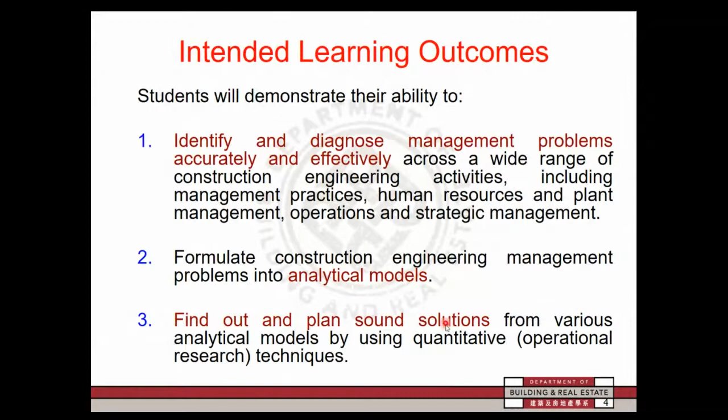After identifying the problems, you may put your problems into some kind of analytical models for analysis. Then, based on the results of the analysis, you can make your decisions and make your recommendations, solutions, based on the results obtained from those operational research techniques in order to get the best optimal results for implementation. So by the end of this subject, you should be able to achieve all these learning outcomes yourself.

We also come up with around 10 lecture topics for this subject, including construction productivity measurement, part 1 and part 2, that I'm going to share with you tonight. After that, I will start to share with you some of the common operational research techniques that you can use in order to find out the best solutions for you, including decision theory and application, inventory control theory, as well as Monte Carlo simulation. Okay, we try to play around with probability and statistics under those theories.

Last but not least, I will also share with you how to achieve fast-track construction from technology point of view and from management point of view. In the past, in order to achieve fast-track construction, we would make large scale prefabricated structural elements like precast facades, precast staircases, precast beams, and precast kitchens, especially for those public housing projects.

More recently, the CIC, Construction Industry Council, tried to make a big push in using MIC, modular integrated construction methods, in order to develop those prefabricated units put on top one by one to the building, in order to achieve fast-track construction by using those new technologies. So I will go through all these topics with you during the first half of the subject.

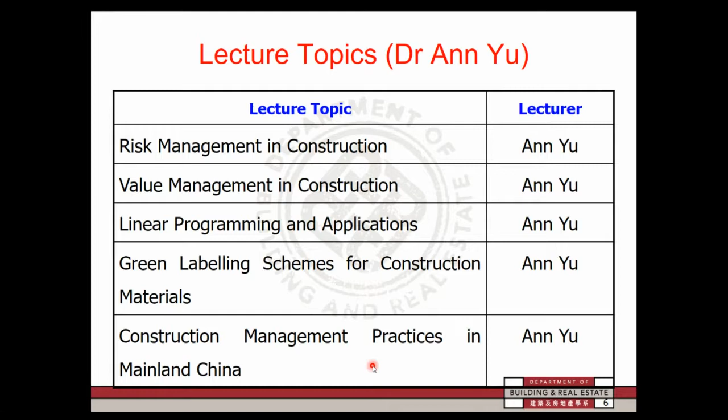Last but not least, she's going to share with you some basic concepts, operations of construction management practices in mainland China. Okay, in terms of teaching and learning approach, for part-time students, usually we have 3 hours per night. Usually we have 2 hours for the lecture plus 1 hour for the tutorial.

In the lectures, we try to present to you some basic concepts and principles of different topical areas that I just mentioned. Apart from lectures, we are going to have some small group tutorial sessions, so that in the tutorial classes, you'll be given some in-class problem-based assignments to work with in order to test your understanding, applications of those concepts in real life, and also some discussion topics, problem solving, and group presentation. And the detailed arrangement of the tutorial will be briefed by the subject tutor during the first tutorial class of each

next week. Apart from those lectures and tutorials, you may also need to have some kind of self-study yourself by looking at those recommended references already included at the end of each lecture PowerPoint file, and also included in the subject description form for your self-study and self-learning.

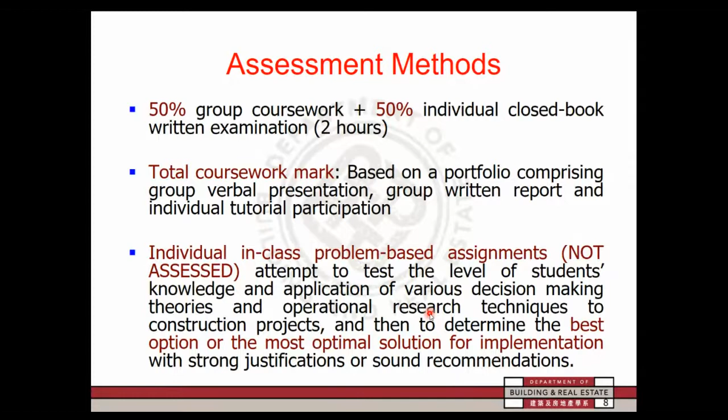Again, you are strongly recommended to refer to those recommended references already included in the subject description form, as well as at the end of each PowerPoint file for self-learning.

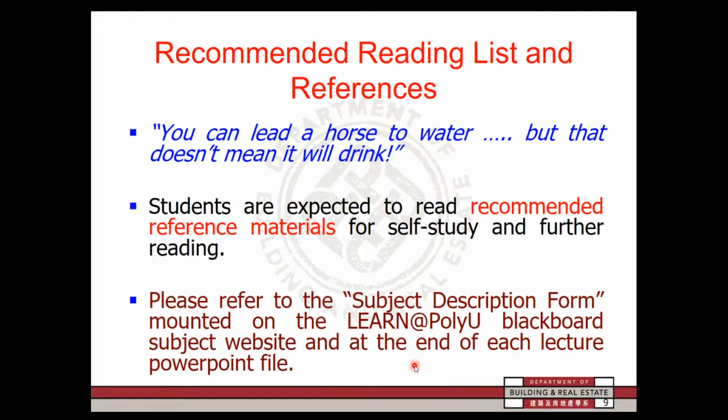Okay, most of the subject material is already uploaded to the Learn at PolyU Blackboard website. You may just simply go to this web link URL and log in with your student ID and password. The essential information is already marked up there, like the subject description form, lecture and tutorial schedule, the subject introduction that I'm sharing with you right now, corresponding lecture notes, and associated in-class tutorial exercises for you to work with. The questions and guidelines for the seminar presentation, very detailed, are already marked up there.

Last but not least, there should be some standard evaluation forms for the verbal presentation and written report, including the guidelines, the assessment criteria, as well as the assessment rubrics, before your verbal presentation and submission of your written report, so that you can see how you are going to be assessed in the verbal presentation as well as the written report. Okay, that's a very brief introduction about the subject.

Okay, any problem so far? Okay, students, is it clear? Can you follow me? Okay, good. I just remembered that you have already finished your capstone project, BRE 466, in last semester 1. So this semester would be your final semester before graduation, including this subject. Okay, thank you for your responses. Okay, I saw quite a number of students joining in after work. Welcome again to this subject, just to catch up.

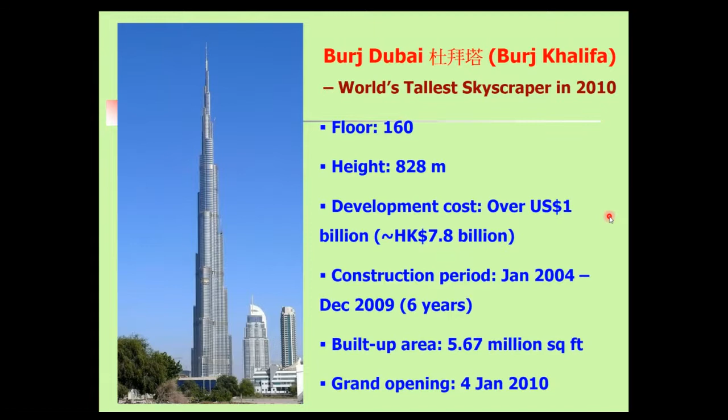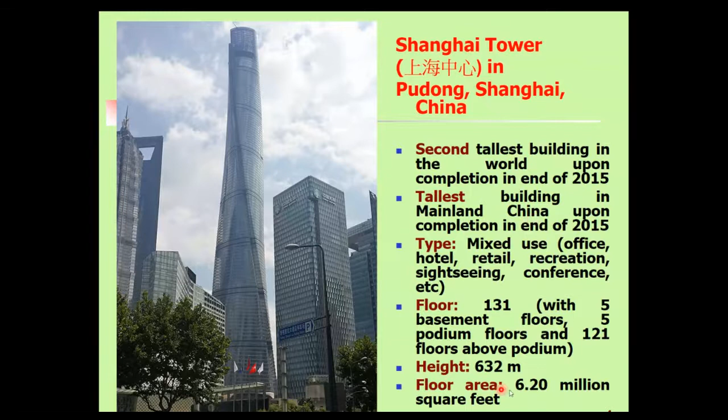How about in mainland China? In mainland China, we also have another high-rise building, Shanghai Tower, located in Pudong, Shanghai. It was claimed as the second tallest building in the world upon completion in 2015, and as the tallest building in mainland China. It has a height equal to 632 meters. Nothing is impossible, again, if you have money in hand.

Okay, so the topics that I'm going to share with you under this area are what production and productivity are by definition, and what the common productivity techniques are that we can use, including work study. Under work study, we may have method study and work measurement. Work measurement techniques will mainly consist of continuous time study as well as activity sampling or work sampling methods. Last but not least, I'm going to share with you some of the essential factors which will affect construction productivity, sought from different literature reviews.

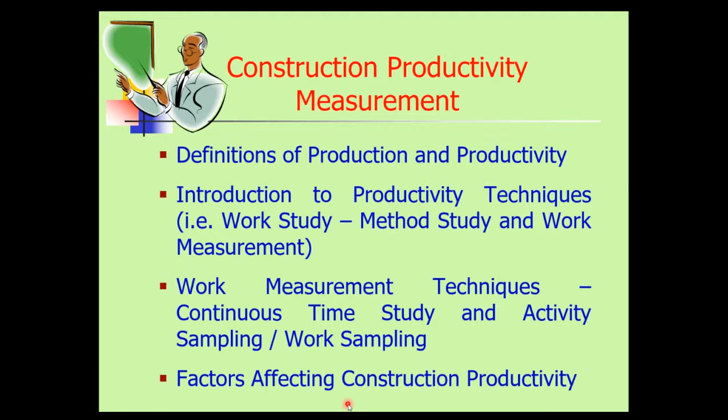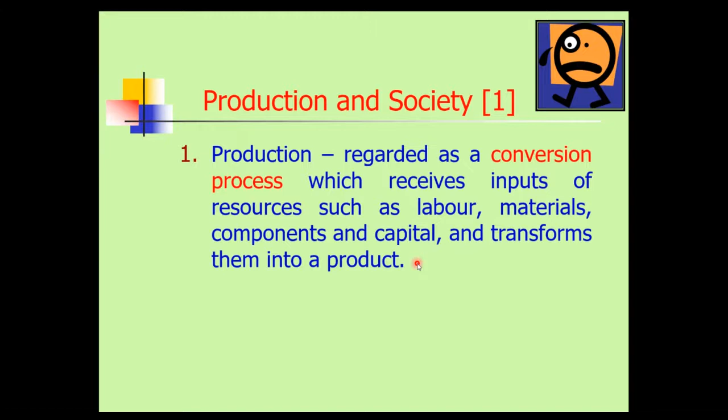Okay, first of all, what is production by definition? Production is simply a process, a conversion process. We try to convert the inputs, like labor, material, components, capital, into some kind of outputs, like our final products. The final products usually add value. That means the total output will be more valuable than the sum of the individual inputs. Just like under synergy theory, 1 + 1 is larger than 2, because the final products will be more useful.

Or you can use this diagram to show the relationship. Inputs can be labor, materials, components, or capital. Then what are common labor in construction projects?

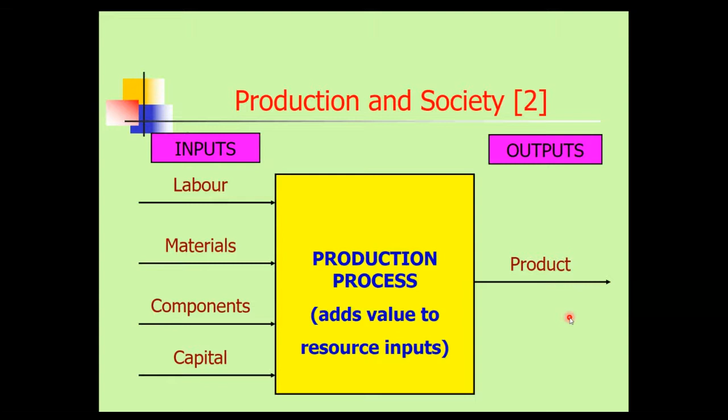Okay, what is production function? Production function is where we try to relate the outputs to the inputs through a mathematical relationship. Mathematically, output is equal to a function of land, labor, materials, and capital. And the outcome of the production process is usually affected by both factors. One may be technological factors. For example, we can use higher power productive machinery to help us, or we can also come up with some human factors, social factors, in order to motivate the workers to work faster and harder. Investment in education and training so that the skills of the labor can be enhanced, or increase the labor motivation.

If you can achieve a higher productivity level, you can earn more. Or we can also provide a year-end bonus. If the workers perform well, then we can give them a year-end bonus as a kind of appreciation and motivation.

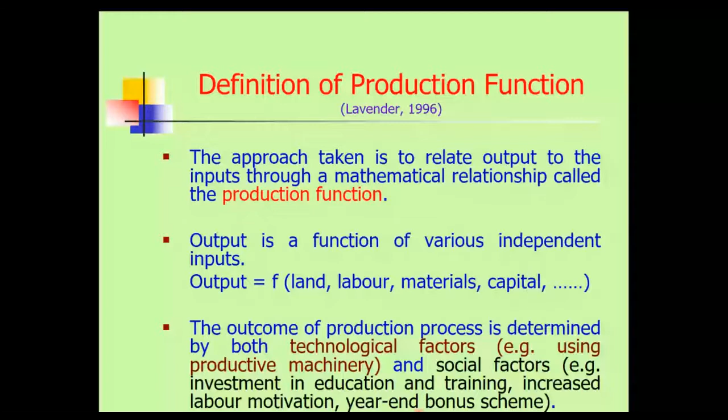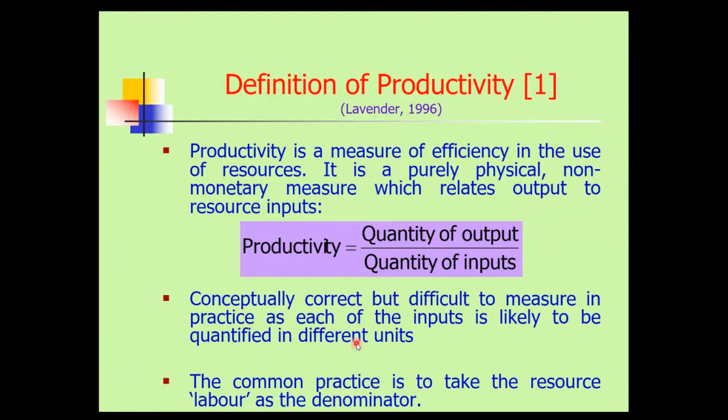Again, productivity can be interpreted as the ratio of outputs to inputs mathematically. Conceptually, this equation is correct, but in real life, it may be difficult to find out, because the inputs from different resources may be measured in different units. It's difficult to combine them into one single measure in real life. Again, productivity is equal to the ratio of output to inputs. The inputs can be labor, materials, plant and equipment, capital, energy, and all these.

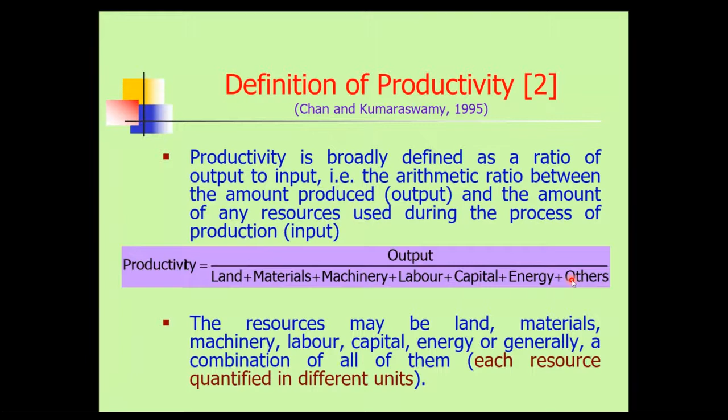So in principle, we try to fully utilize our construction resources, including labor, plant and equipment, and material as far as possible, so that we can complete our project in the least possible time and at lower cost. But in real life, this ideal case will not be achieved. In order to improve productivity, we can enhance it without major expenditure on new resources. For example, the concreting process. We can redesign the concreting process in order to have a smoother concrete delivery from concrete batching plants to your site. We need to carefully design the whole concreting delivery process step by step, so that you can have a smooth supply of material to your site without any interruption.

Or we can also invest some money in resources in order to enhance productivity. For example, we can make use of highly efficient machinery or a higher power concrete pump with higher pumping rates. If we can make use of a higher power concrete pump, you can pump the concrete faster, so that the productivity can also be higher.

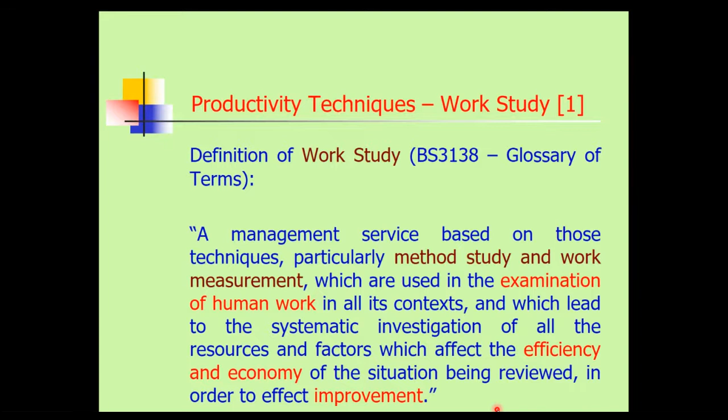Work study: according to British Standard 3138, work study is a technique including method study and work measurement. We examine all human work holistically, and then systematically investigate all the resources and factors which will affect the efficiency and economy of the situation under review, in order to make improvements. This is a very comprehensive definition about work study.

The concept of work study was developed in the early 20th century for us to investigate, analyze, and improve plant utilization levels and site productivity levels altogether.

Under work study, we can have method study or work measurement. Method study means we try to look at the whole production process to see what happened, whether there are any problems in the process. If there are, we try to identify the problem first and then make improvements. Method study means we look at the method of production, the production process itself.

For work measurement, we try to find out the standard duration for a normal worker to complete a task. That means we want to establish the standard for control and comparison—for a given scale of work, how long will it take for a normal worker to complete? We want to set the standard duration to complete all this work.

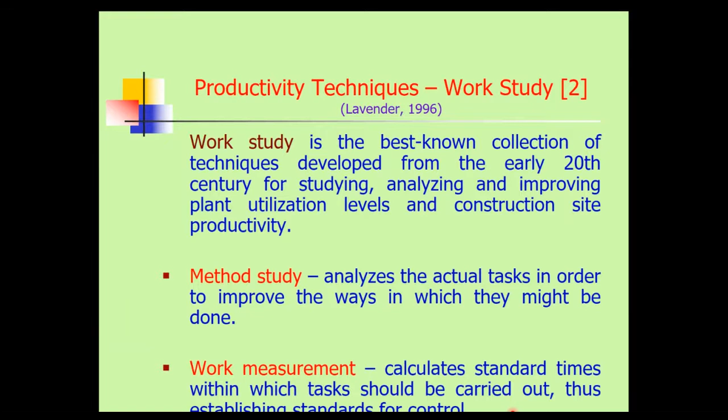By using several productivity techniques, it can give you higher productivity from different perspectives.

To the employer, if we can achieve higher productivity, that means lower cost, and by having lower cost, we can have higher profits. To the workers, if they can achieve higher productivity levels, they can earn higher salary and better job employment terms, conditions, and promotions.

For application, we try to establish a standard for us to follow—for example, how much it costs per meter cube of concrete in order to set the piecework rate and incentive schemes. We need to set the standard, not too high and not too low, in order to benchmark the performance or productivity level of different workers.

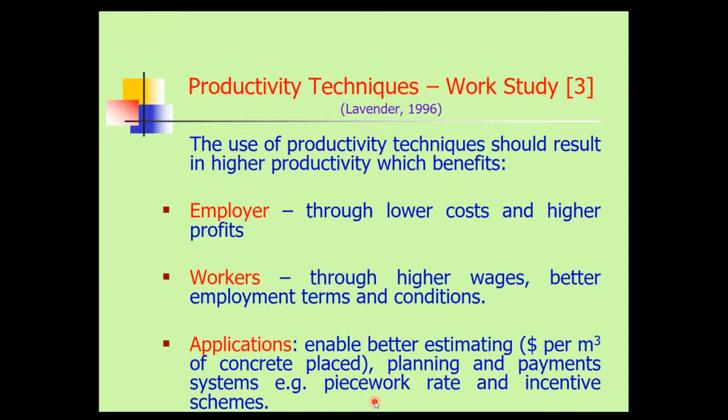Apart from work study, under work study we have a method called method study. Again according to British Standard, we try to systematically record and critically examine all the major factors and resources in the existing production process and the proposed or revised method of production, in order to find easier and more effective methods for the production process and reduce cost.

Again, it's a very comprehensive definition about method study. We also want to note that method study can be regarded as a kind of process observation, because we look at the process one by one along the whole production process to see whether the production line is smooth or not, problem-free or not.

Method study: how do we apply method study in real life? First, we try to classify and select those operations under study that we're interested in looking at, then try to record all the basic procedures along the production process, and then critically examine and analyze the production methods stage by stage.

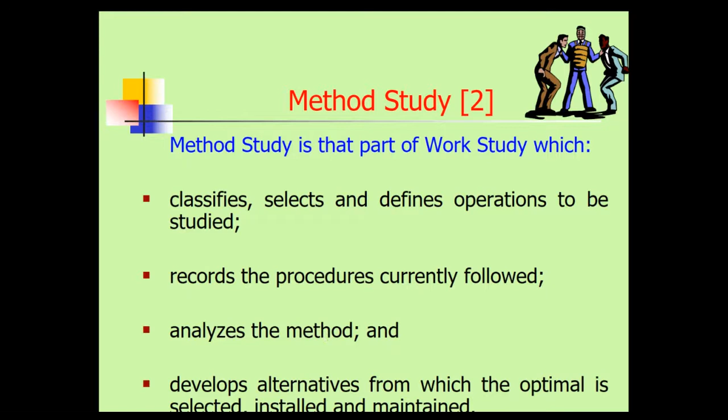If we identify some problems, we may need to come up with alternatives, and then try to apply the alternative for implementation.

Under how can we apply method study in real life? First, we should look at all the resources involved, including labor, material, and plant under method study. We also need to look at the site layout plan—material flow should also be included under investigation.

Usually we try to look at those activities which are repetitive in nature, for example floor cycle times. You can imagine, for a typical building, if the floor cycle time can be reduced by 1 day, the whole superstructure can be reduced by 2 or 3 months, for example.

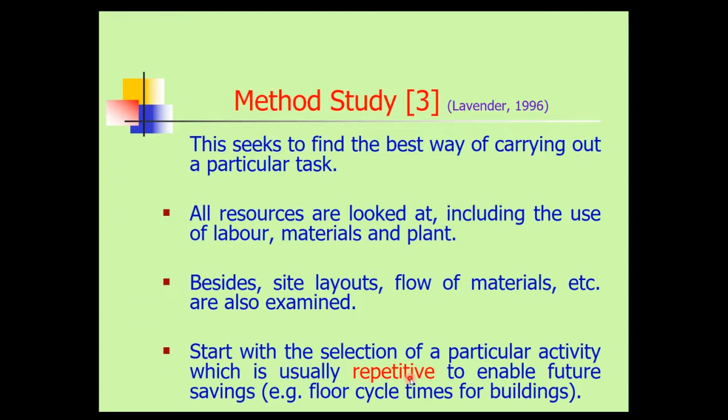If that is the case, the whole project will also be completed earlier by a few months. So usually we focus our attention on those activities which are repeated many times in a project, just like floor cycle times.

So in real life, how can we implement method study? Actually, there are 5 major steps that you may follow. The first one is record.

After identifying your operation, we try to look at those key activities of the production process in more detail by using some graphical methods, usually pie chart or flow chart, to list out the main activities step by step, logically.

Then examine. We try to critically analyze those activities and identify any problems. After identifying the problems, we may need to provide some alternative solutions for implementation. Then we can develop the best method or alternative, and try to install that new method under supervision of supervisors and operatives.

At the end of the day, if you find out that the new method of production is good and effective enough, then we can keep installing it for implementation. Otherwise, we may need to come up with another method and inject it into the production process to rerun the process again.

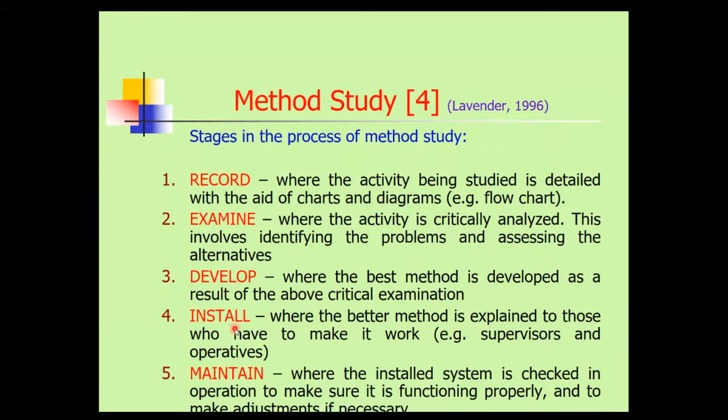Under what conditions should we implement method study? Usually all those situations and circumstances listed here are quite negative or unfavorable. For example, is there any bottleneck in material flow? That means non-continuous concrete supply from batching plants to your site. Try to see whether you have a smooth concrete supply process between the batching plant and your concerned sites.

Or you may encounter some double handling of materials, idling plant or equipment. That means the machinery is always stopped there, doing nothing, or the workers are always standing there without doing things. They may be waiting for something, so we need to find out the reason why they are always idling.

Or your site may have a lot of accidents. Then you may need to find out if there are problems with the safety and health measures being insufficient or not effective. Or you may encounter a high sickness level, maybe due to poor air ventilation or frequent machinery breakdowns. Then we need to find out the reason in order to make some improvement.

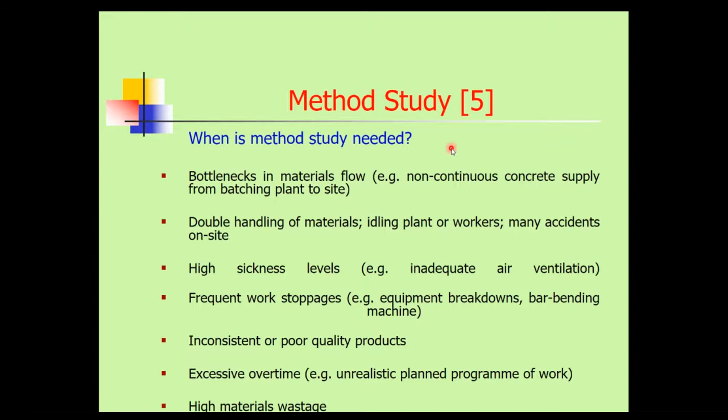Poor quality products, excessive overtime, or high material wastage. For high material wastage, that means there may be some problem in the production process which will affect your quality, and a lot of material may be treated as waste, not up to standard. There should be some problem in the production process that we need to find out. If you encounter all these unfavorable situations, you may consider using method study to find out problems and make corresponding improvements accordingly.

Apart from method study, we also have work measurement. According to British standard, work measurement involves using techniques to find out the time for a qualified worker to carry out a particular job at a defined level of performance. Usually, for a certain operation, we may need to break down the operation into typical activities or sub-activities for us to investigate.

The main function of using work measurement techniques is to set the standards for control and comparison. Work measurement means we try to estimate how long it will take for a normal worker to complete a particular task: 3 days, 5 days, or 7 days. By setting this standard, just like a ruler, we can estimate the bonus rates and the payment by result rates.

That means if a worker can meet this basic minimum standard, then I can pay you the salary. If they perform higher than average level, I can give you more, reward you more. That's the situation where we need to set the benchmark for comparison.

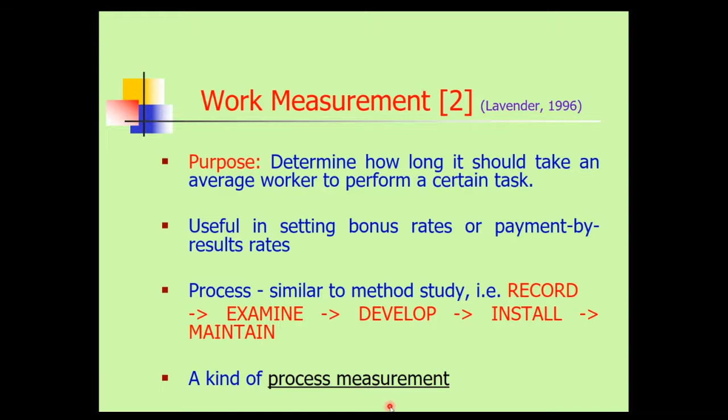In terms of work measurement techniques, we have two: continuous time study and activity sampling. For continuous time study, that means it involves the measurement of the time taken to perform a particular task using a stopwatch. At the end of the day, we want to set the standard, that is, how long we take for this activity to complete on average, a reasonable duration. We applied continuous time study.

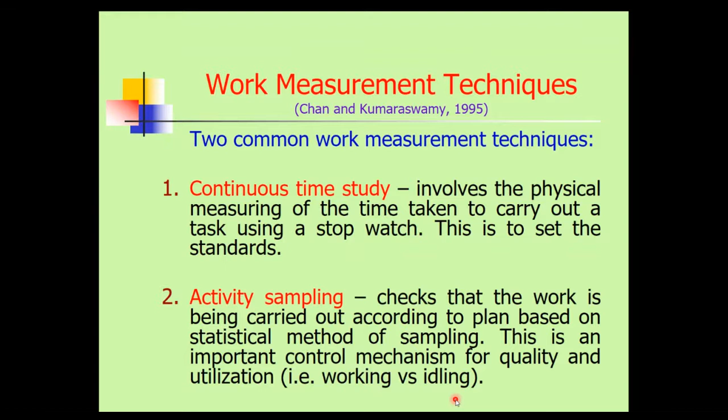Activity sampling means we try to check out the work we are carrying out according to the plan, based on a statistical method of sampling. Again, we are going to play around with statistics and try to assess a mechanism for quality and utilization. For example, whether machinery or a worker is working versus idling, we may want to find out the percentage between them: what percentage of actual working and what percentage of lazy idling for your resources.

Okay, let's talk about continuous time study. There are some basic features that you need to know under time study.

I just extracted some information from a previous journal paper written by me. This Chan is me, and Kumaraswamy is my PhD supervisor, now already retired three years ago. He's now back in Sri Lanka. We published a paper making use of continuous time study and activity sampling. For details, you can refer to this Chan and Kumaraswamy journal paper published in 1995, just over 30 years ago.

Continuous time study will be more suitable for those activities with a cyclic nature, with a few resources involved, just like the cycle times. If we can focus our attention on those repetitive activities, the impact or effect will be very significant.

We try to do some measurements from start time to finish time of a certain activity, using a stopwatch to measure time taken for each sub-activity, recorded on some standard data sheet. From the two consecutive readings from the stopwatch, we can find out the duration for each of these activities for record. In order to achieve highly reliable results, we may need to make an adequate number of site observations ourselves. Those are the key features about continuous time study.

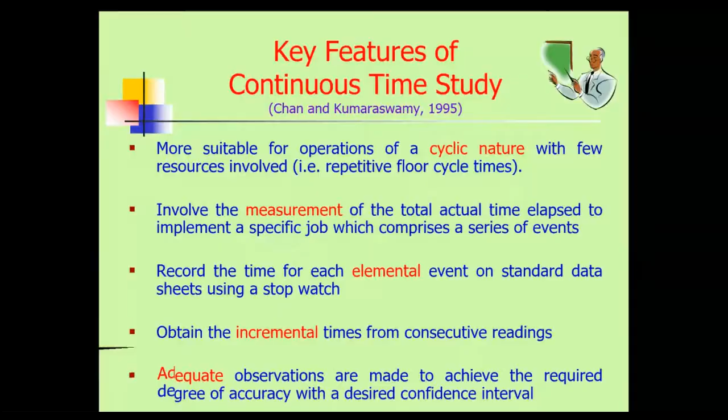In real life, there are a lot of productivity measurement indicators that we can think of, depending on which level - it may be macro level, meso level, or micro level.

For the macro level, usually senior management or top management - your boss, the CEO, the MD - may be more interested in macro level indicators, just like meter square or floor area per man day. That means, per man day, how many meters square of floor area can be completed. It's a more general measure, holistically as a whole.

Middle level maybe at the middle management, just like project manager - how many meters square of flooring can be completed per man day?

Micro level may be more related to the supervisory staff or frontline site workers, depending on the trade. For example, how many meter cube of concrete can be cast per man hour, or how many meter cube of concrete can be pumped by the concrete pump per pump hour. Or how many man hours will be required to cast one meter cube of concrete, formwork or steel. So at different levels of personnel, we may have different measures of productivity indicators.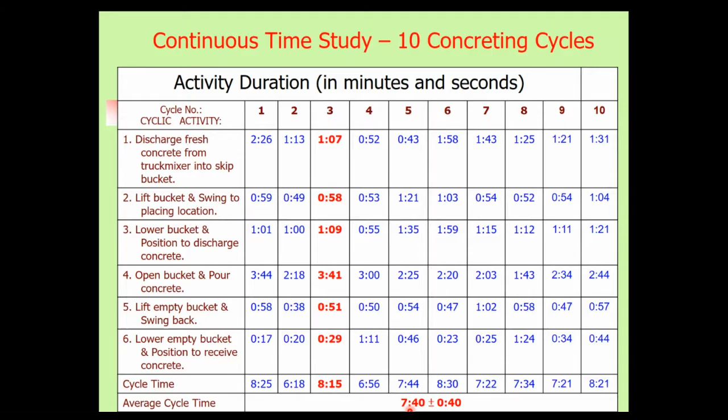Okay, so the average cycle time is 7 minutes 40 seconds. The volume 1.2 meter cube divided by the time for one cycle. We can get 9.4 meter cube per hour if the concrete is to be cast by the tower crane and skip bucket method.

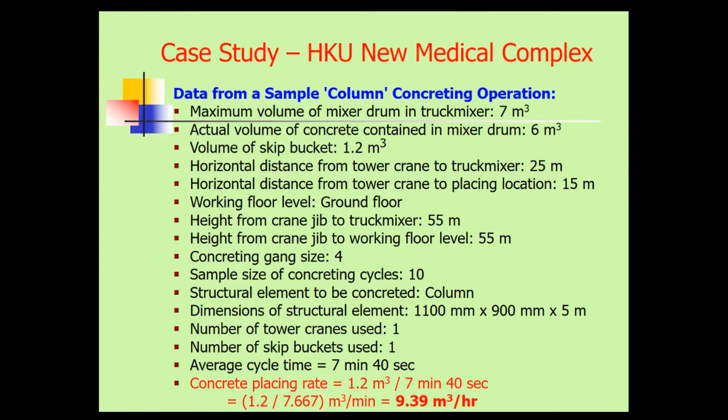Okay, how about the situation for slab and beam? We can also use the same method, but this time instead of column formwork, we pour the concrete into slab and beam. And the average cycle time for slab and beam may be much shorter. Imagine, when we are casting the slab and beam, usually there's a larger floor area, so the time to pour the concrete will be shorter.

Maybe only 4 minutes 30 seconds. For the same volume of concrete, 1.2 meter cube of skip bucket divided by 4 minutes 30 seconds, the yield rate is a bit higher, 16 meter cube per hour, a bit faster than that for column formwork, equal to 9.4 meter cube per hour. It's quite reasonable, right?

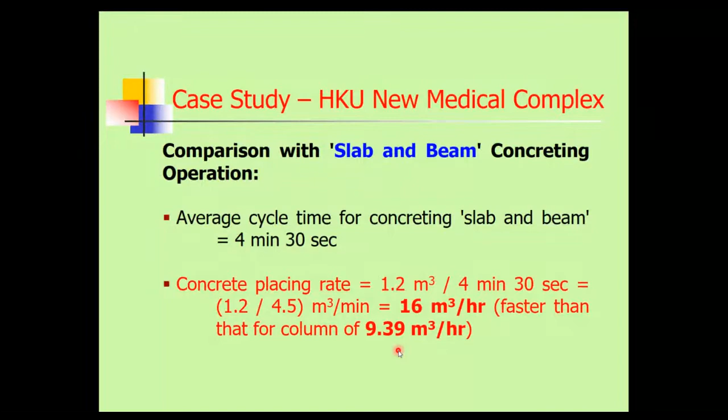Okay, so before going on, I would like to give a short break for 5 minutes, and then we can continue with the sharing at 8:05. Okay, take a 5 minute break first. Take a short break. Can you follow me so far for the lecture materials? Okay, very good. Thank you for your responses. Just take a short break.

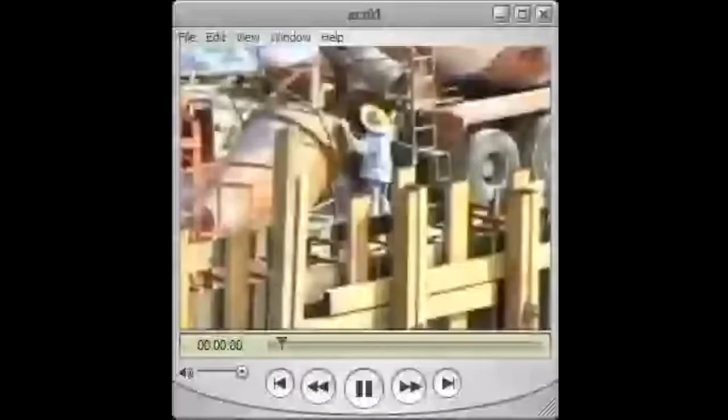Okay, very good. Okay, just look at the video. No sound. Yes, it's no sound. Just the video without any sound.

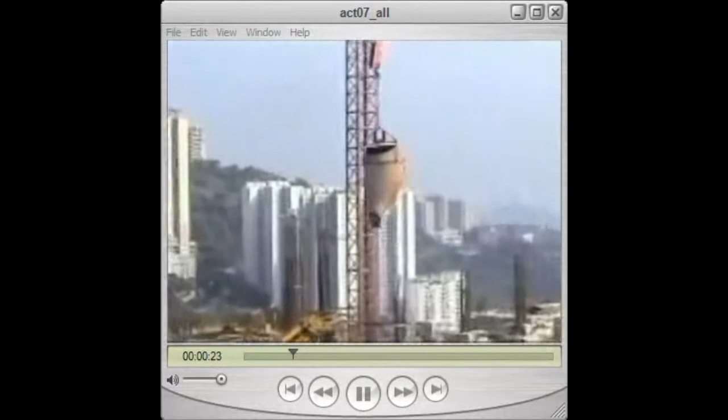First of all, we need to discharge the concrete from the truck mixer to the skip bucket, and the tower crane will lift up the skip bucket and swing to the location where the concrete will be poured out. That means the column formwork. While we are taking the video, we may also need to use your stopwatch to take the time required.

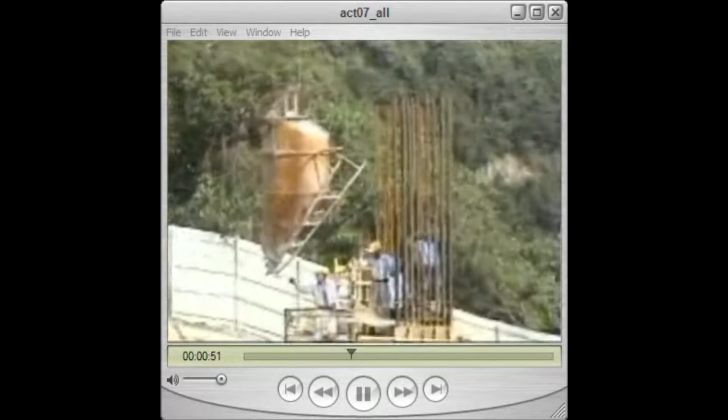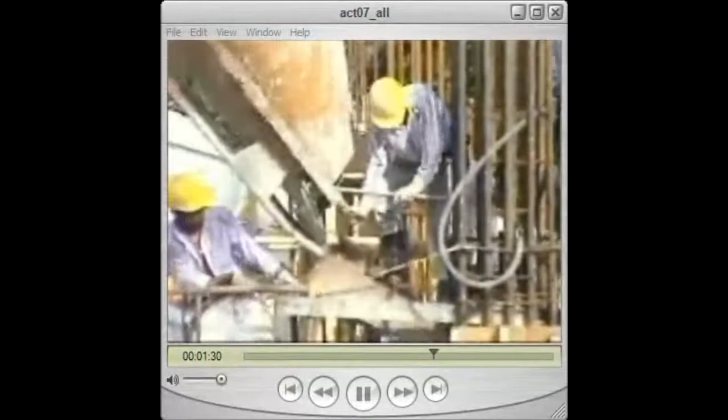Now, the tower crane will lower down the skip bucket, and the concreters are ready to position the skip bucket, and then try to position, fix it, and then open the skip bucket to pour the concrete out. You can see that the concreters are using the poker vibrator to extract the air bubbles trapped inside the concrete in order to prevent honeycombing problems.

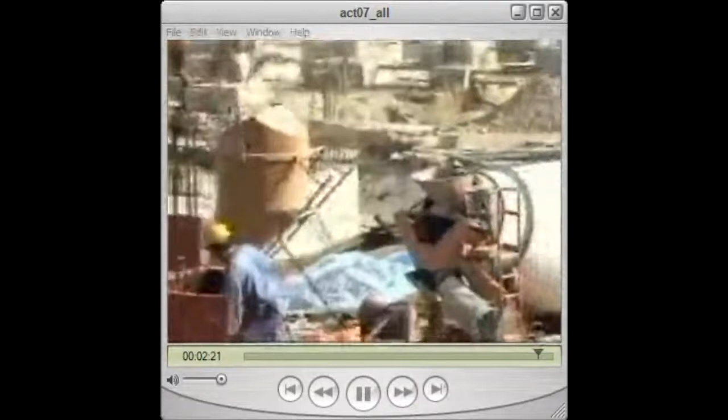Okay, finally, the tower crane lifts up the empty bucket and swings back to the truck mixer position. Finally, the tower crane lowers down the empty skip bucket, and the worker is ready to position it in order to receive the next pour. Okay, because this video is captured and maybe through the Blackboard website, there may be some time difference. Anyway, you can have an idea how to capture the video and measure the time duration for a typical concreting cycle.

Okay, going back to our PowerPoint. Okay, let's continue with the discussion on this one. Let's look at some other situation of time study. Now, for example, we try to compare two different concrete placing methods by using the time study method. Again, based on my PhD research study.

The two concrete placing methods: the pumping method, to pump concrete to cast the beam and slab. Usually for beam and slab, we have a larger floor area. We can use the concrete pump to pump the concrete faster. But for column and wall, usually we need to use the tower crane and skip bucket method, because the area of the column and wall formwork is very, very small. We need to use the skip bucket to slowly pour out the concrete inside the formwork in order to make up the whole column and wall.

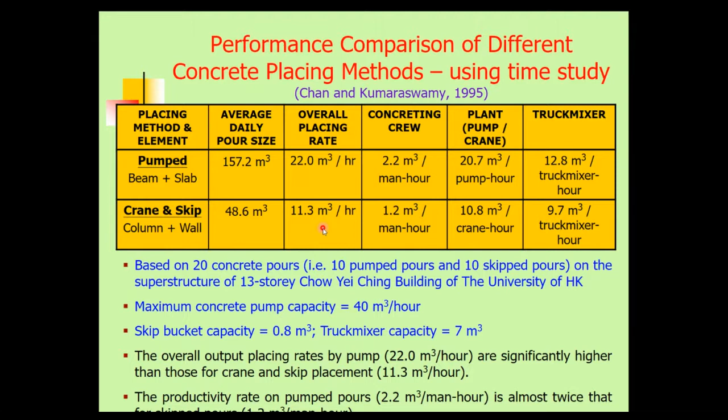Okay, so based on our site observations and simple calculations, we find out that average concrete placing rate by pump is almost double that by crane and skip bucket method. Using a concrete pump to pump the concrete should be much faster than the method using crane and skip.

Another scenario is the time spent by truck mixers at site level. Again, by using the same method, pump beam and slab with distribution pipelines, and cast the column and wall using skip bucket method and tower crane. Then we can measure the average time on site for pump concrete and skip bucket. For concrete pump, because the concrete from the truck mixer will be pumped much faster to empty, the time required will be shorter. But for skip bucket, it should be longer.

Average time for unloading or discharging concrete. This one only takes 15 minutes. Skip method around 26 minutes. So the average percentage time for unloading, that means 15 minutes divided by 24.5 minutes, is around 61.2%. For skip method, 25.9 minutes divided by 42.9 minutes is around 60.4%. We made site observations, 10 observations for each placing method, in order to get more reliable results. So what we can observe here, although the unloading time is quite different between these two methods, the average percentage time for unloading concrete is almost similar, around 60 to 61%.

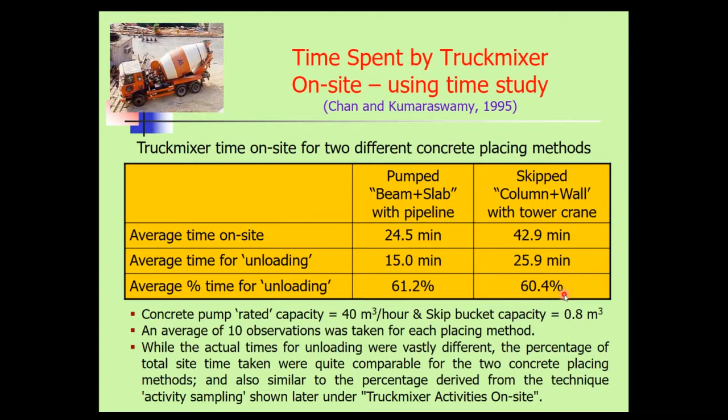Apart from concreting operation, we can also apply the same method to measure steel fixing rates, measured in ton per man hour, based on Hong Kong buildings using the time study method. For example, we have different sizes. Then we want to find out the unit rates to fix steel reinforcement to structural wall and slab. We can take the average around 0.2, right? 0.2 ton of steel reinforcement can be fixed per man hour. For slab also around 0.2.

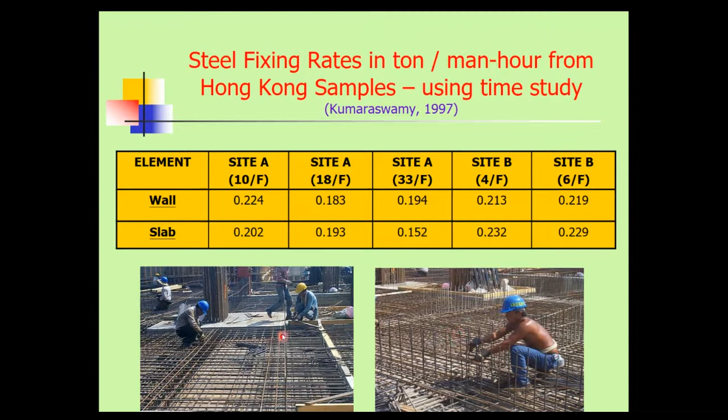Okay, by using this unit rate measure, suppose you have 1,000 tons of steel reinforcement to be fixed, then how many man-hours will be required? By simple calculations, we can find out all these man-hours for site planning. We can see from this photo, the steel fixers are fixing the steel reinforcement to the column and slab. This steel fixer is fixing steel reinforcement to a structural wall vertically. Slab is horizontally.

Okay, another method is multiple activity charts. We try to put all these activities on a single diagram with their time relationship between two or more resources. Usually, we will look at the workers, plant equipment, or materials. This method will be very useful if you want to look at the interactions between workers, plant equipment, and material, which are repeated in periodic cycles, just like concrete cycle times.

By using multiple activity charts, we can find any bottlenecks or idling resources at your site, looking at the utilization profile of each resource in parallel bars. Again, let's take the example of the concrete cycle. A typical concrete cycle consists of these 6 major activities and their corresponding durations.

Then we can put up all this information, all these resources, and the duration on a multiple activity chart. Multiple activity means we try to put up all the major activities for the operation into a diagram for comparison. Horizontally, we can show the time bar: 1 minute, 2 minutes, 3 minutes, etc. Vertically, we can show the site resources: truck mixer, tower crane and skip bucket, and also concrete crew. There may be 3 resources involved in this concrete operation.

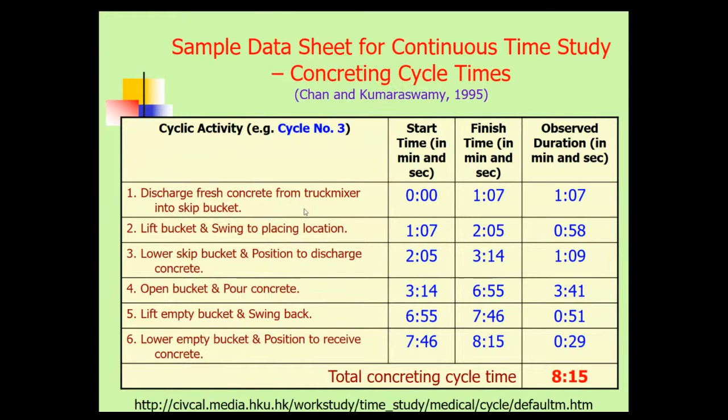How about the tower crane and skip bucket? Then we carry out the 6 major activities, 1, 2, 3, 4, 5, 6, and then finish one cycle. It may take 8 minutes 15 seconds, and then repeat 1, 2, 3, 4, etc. How about the concreting crew? At the first concreting cycle, the concrete crew has nothing to do. So for the first 3 activities, they are idling. They are just waiting for the skip bucket to come. Starting from activity 4. What is activity 4?

Open bucket and pour out concrete, because the concrete crew need to position the skip bucket ready for pouring out the concrete inside. So they need some time to pour out the concrete into the column formwork and make use of the poker vibrator to expel the air trapped inside the concrete in order to prevent honeycombing problems. It may take some time. After finishing compacting concrete, the concrete crew becomes idling again until they receive the second skip bucket ready to be poured out like this. So all these activities will be repeated many times depending on the situation.

How about the second scenario? The second scenario is the concrete crew becomes idling. Maybe they finish compacting the concrete, but the next skip bucket has not yet arrived, so they become idling. We may have these two situations. What can we do in order to sort out scenario A and scenario B? In order to reduce the idling time for scenario A, we can increase the number of poker vibrators, because by having more poker vibrators, the compacting concrete activity can be finished earlier, so that the idling time can be reduced.

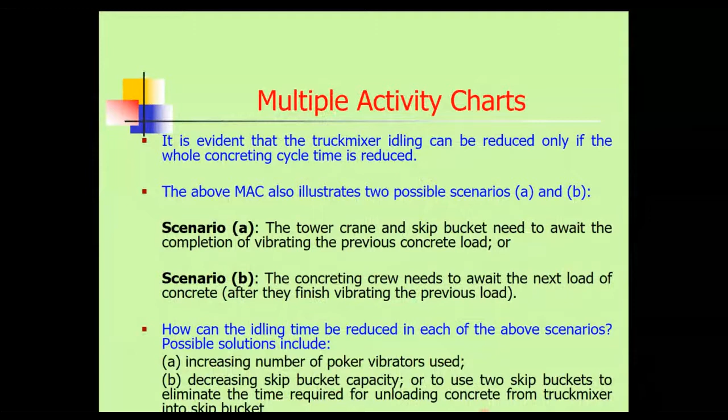For the second scenario, we can decrease the volume of the skip bucket, so that the workers can finish compacting concrete earlier, and then they become less idle. Or we can use two skip buckets. While the first bucket is transferring to the column formwork, the concreter can pour the concrete into the second skip bucket from the truck mixer in order to reduce the time involved. So using multiple activity charts can help us find out the problems and then make some remedial actions for improvement like this.

Okay, apart from continuous time study, we can also have activity sampling or work sampling methods. Again, what is activity sampling? Activity sampling is a technique in which we make a number of successive observations over a period of time of a group of machinery, process, or workers, and try to observe and record what's happening at that instant. And the percentage of observations recorded for some activity is a measure of the percentage of time that the activity or delay will occur. A very comprehensive definition.

Again, in order to have more reliable results, we may need a sufficient number of observations to be made. Statistically, we can make use of this equation. How many site observations do we need? Capital N is the total number of site observations required, that means the sample size. And capital P is the basic productivity level. Usually we assume half of the time is doing something productive, so usually 50%. And L is the absolute limit of error, usually plus or minus 5%, equal to the confidence interval. Confidence level equal to 95%.

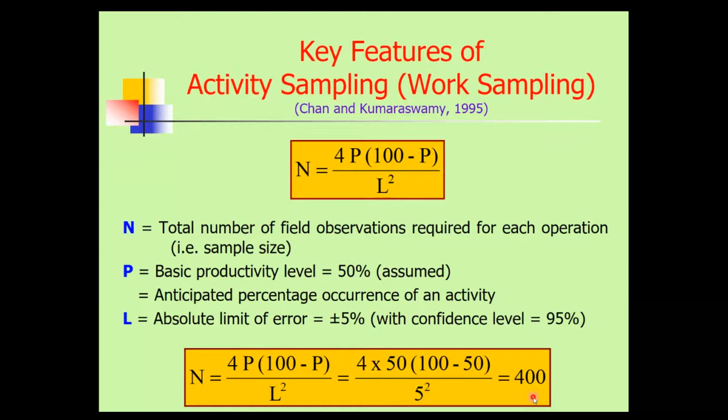If we insert all these values, 4 times 50 times 100 minus 50, divided by 5 squared, that means we need at least 400 site observations in order to get more reliable results. So at site level, we may have a lot of examples of using activity sampling. For example, we want to measure the utilization levels of tower cranes at site level, truck mixer activities, as well as the efficiency of different site workers, like concreters, timber formwork erectors, as well as steel reinforcement fixers.

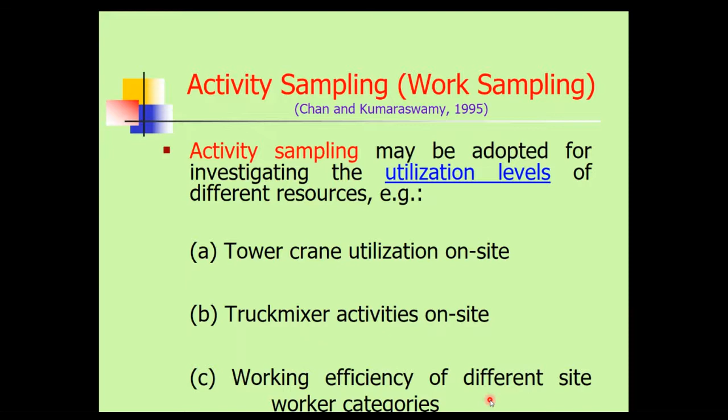So in order to collect the data, we may need to compile a standard data collection form like this. On top of the form, you may write down some details about the project: project name, the date of collection, time start, time finish. At the lower half of the form, you may record the time. Maybe you start the site observation at 9 a.m. sharp, and then on the far right hand side, you can list out whether the tower crane is hoisting the formwork, steel reinforcement, concrete, or other materials.

If it is hoisting those materials, we can regard the tower crane as doing something productive. If the tower crane is just moving empty or just idling, stopped there without hoisting anything, then we can regard it as doing something non-productive. Now suppose I start the site observation at 9 a.m. sharp and look at the tower crane. What is it hoisting at that moment? Maybe this time the tower crane is hoisting formwork. So under formwork, I put a tick here.

Maybe at the end of the day, over 3 working days, you find a total number of ticks here. Add up all these numbers: 254, non-productive 154 ticks. Then you can roughly estimate out of around 400 observations, 254 divided by total number of observations gives you the percentage 62.3%, moving empty...

17.10%, idling around 20%. The crane utilization level is defined as the time spent by the crane working, doing something productive, divided by total time the crane is available for work, multiplied by 100%.

By looking at this figure, 62.3% that the tower crane is hoisting material, the site engineer or planning engineer may think about whether this is acceptable, because the tower crane is only around 62% productive hoisting material on a typical day. There's also a high percentage of time moving empty or idling, up to 20%, so the site engineer can think whether we can make the tower crane more productive by increasing that percentage.

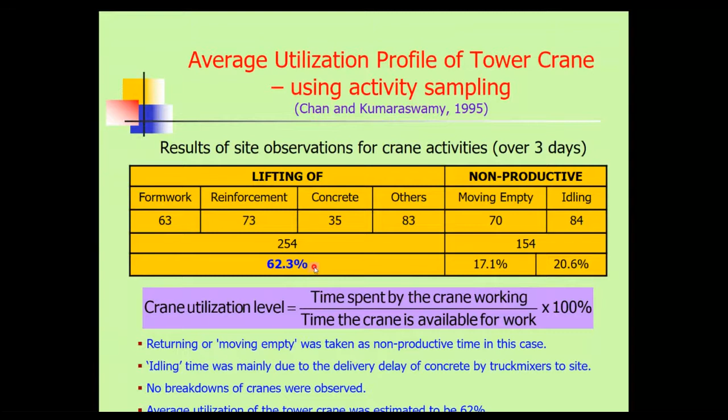Again, we need to find out the reason why the truck mixer is always idling and sometimes queuing. If we can find out all these problems, we can fully utilize the truck mixer time on site in order to make it more productive.

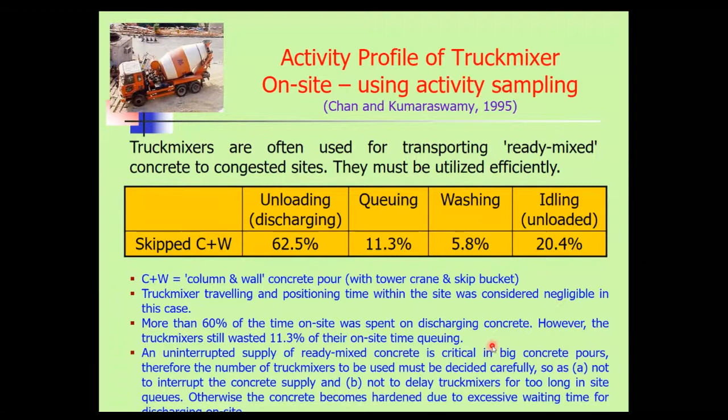Another situation is we want to look at the working efficiency of different site workers using activity sampling methods. Before carrying out the site observation, we may need to classify the site workers' activity into 3 types.

Direct work, that means it will positively influence the progress of the activity, grouped under item A. Essential contributory work means work that, although indirect, has a positive influence on the progress, such as carrying materials or tools, making work-related communication or measurements, item B to E in the next table.

Finally, type C is ineffective activities, including doing nothing or doing something not important to the progress, for example just waiting for material or tools, item F to M.

Now suppose we want to look at the situation for the 4 types of common workers, like formwork crew, bar bending crew, bar fixing crew, and concreting crew.

Suppose let's look at the example of a formwork crew on the building site. The formwork crew may consist of the foreman as the leader, and under him there may be 2 formwork crews, crew 1 and crew 2.

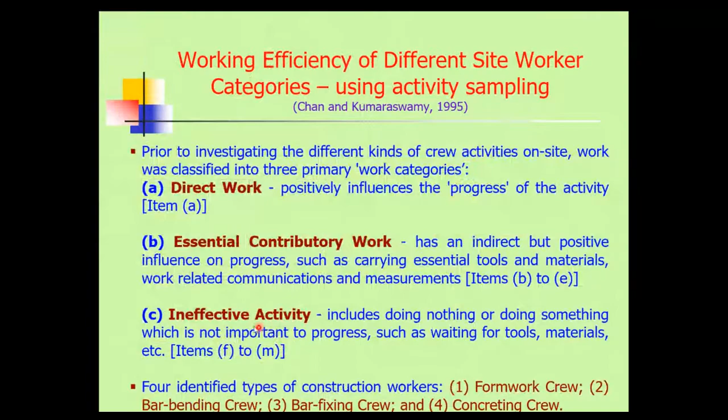Then after another 30-second interval, we look at the same crew again: what is the foreman doing, Cat 1, Cat 2, or Cat 3, etc. We try to make the observation consecutively over 400 observations, and then count the total number of ticks. Cat 1 means direct work, Cat 2 means essential contributory work, and Cat 3 is ineffective activities, non-productive.

After looking at the percentages, you may make some observations. For example, among the 4 types of worker, the bar fixing crew has a high percentage of direct work, up to 40%. But the lowest is bar bending, so we need to focus on why the direct work of bar bending crew is so low, just 11%.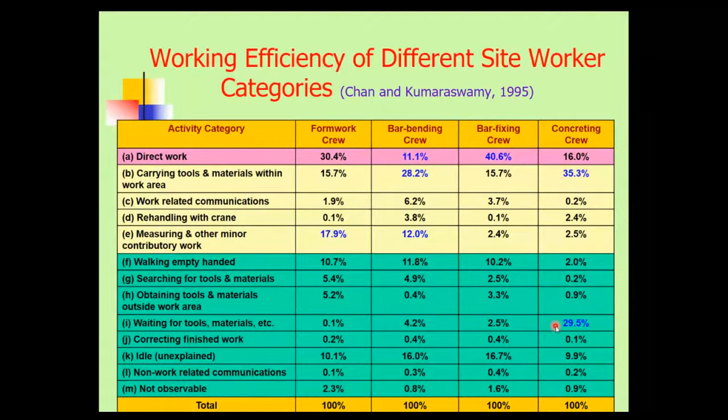Finally, another observation relates to concreting crew waiting for tools and material - up to almost 30%. It's not too productive, so the site engineer may need to find out why the concreting crew is always waiting for tools and material. Maybe they're just waiting for a skip bucket to come to site. They need to find out why, and whether there's a problem with concrete delivery from the batching plant to the site level. By collecting all this data, it can tell you a lot of secrets behind, and help identify problems and make improvements.

After collecting the data, apart from presenting it in a table, you may also make use of some graphical methods to show the distribution clearly, using diagrams and charts.

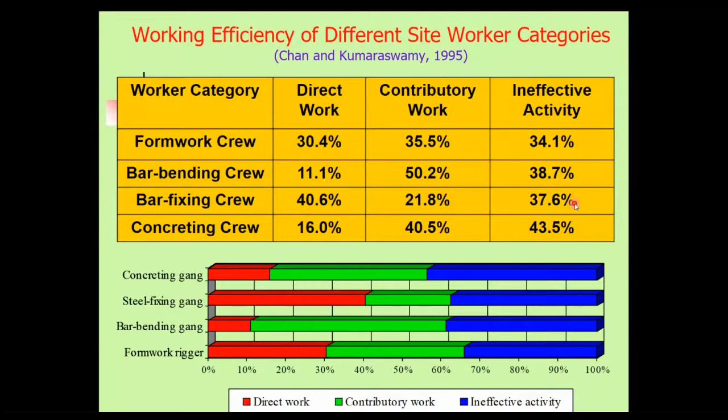After sharing with you some of the basic concepts regarding continuous time study as well as this template, now let's conclude. What are the major factors which affect labor productivity in construction in general, based on literature? For example, the skill level, number, and balance of labor force.

If the skill level of labor can be enhanced, productivity will also be higher - very logical. Age and physical health condition of workers - if they are younger, they should be more productive. Motivation towards the labor force - we can provide more financial incentive to encourage and motivate them to work faster and harder, just like year-end bonus, cash reward, prize award, or job promotion.

We can also consider the degree of mechanization and level of utilization. If we can use more mechanized methods of construction, like tower crane, large panel steel formwork system, hydraulic concrete boom placer, and concrete batching plant on site, then we can also increase our productivity.

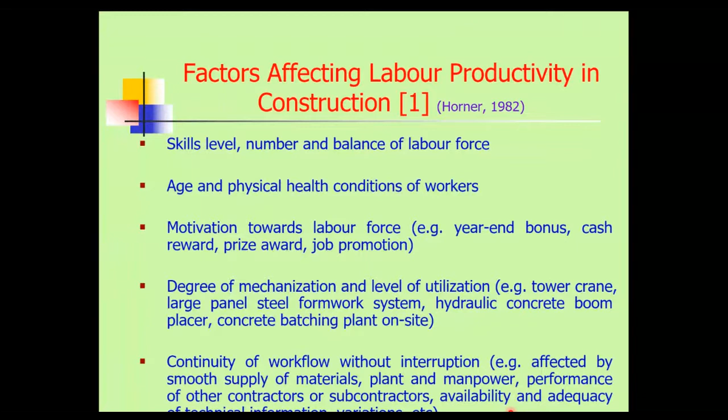And we try to maintain continuous workflow without any interruption, through smooth supply of material, plant and manpower, performance of contractors, availability of materials, and reduced variations. All this can help achieve faster and higher productivity.

Project complexity - that means the buildability of the project design. If your project is so complex, it may take longer. Also the required quality of finished work - higher quality requires more time to do.

It also depends on the construction methods - if we can use more standardized design construction sequences, just like public housing projects, or make use of steelwork construction versus reinforced concrete. More recently, CIC has highly encouraged using prefabricated modular flat units, like module housing or container housing, pre-finishing the flat and putting it up one by one in order to speed up the construction process.

Or whether we can use more project managers to look after overall site supervision in these areas. Finally, how about the weather condition? If the weather is unfavorable - especially during hot weather over 35 degrees Celsius in summertime, heavy windstorm, or typhoon signal number 8 hoisted - then site work will be suspended, and your productivity of the site will be affected.

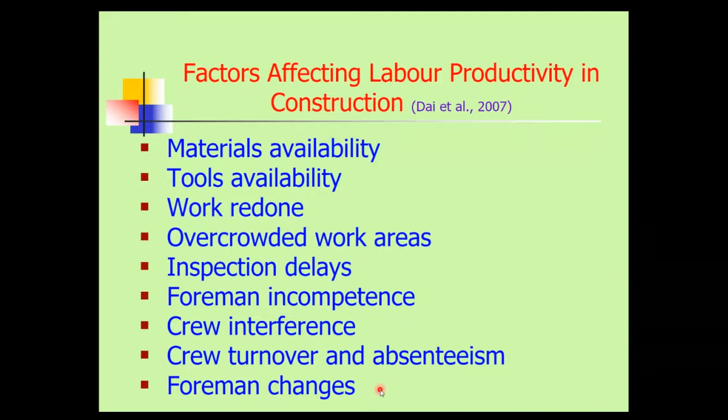Some other researchers also found similar factors which will affect labor productivity in construction, such as material availability, whether we get the material on time, tools availability, whether work can be done right the first time rather than rework, whether the site is overcrowded or small, delays in work inspection by the government or engineers, crew interference, turnover and absenteeism from workers, or a lot of changes from the foreman. All these will affect your productivity and progress.

Last but not least, how about those essential factors discovered from Singapore especially? Similarly, you have buildability of project design, structure of industry, whether we can use more skilled labor versus unskilled labor. If we can make use of more skilled labor, productivity will also be higher. Whether we can provide more training to enhance their skills, use more mechanized and automated construction methods, use more foreign workers familiar with different construction methods, standardization of building design, or mandatory adoption of prefabricated elements under the building authority.

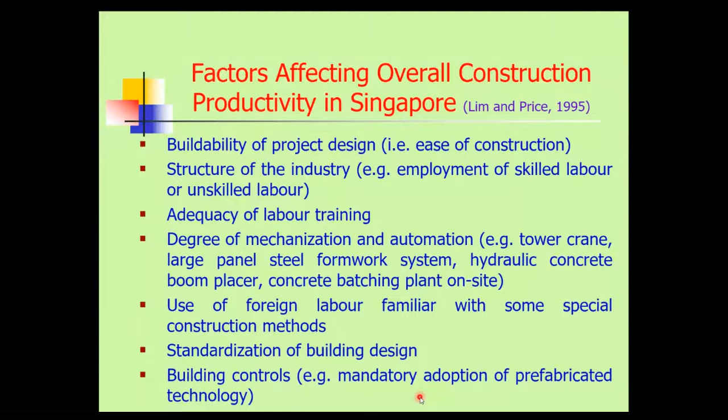Almost finished the lecture tonight. I shared with you some basic concepts regarding productivity, including production, productivity, and productivity techniques, including work study. Under work study, we have method study, looking at the whole production process step by step, and also work measurement techniques, including continuous time study, to estimate the standard duration, as well as activity sampling or work sampling, to estimate how productive your worker or your plant will be.

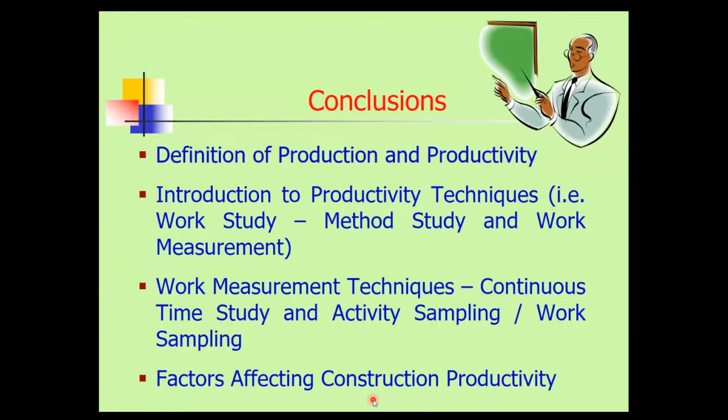Last but not least, I shared with you some of those essential factors which will affect productivity. If you put more focus on those key factors, your productivity will be enhanced in the end.